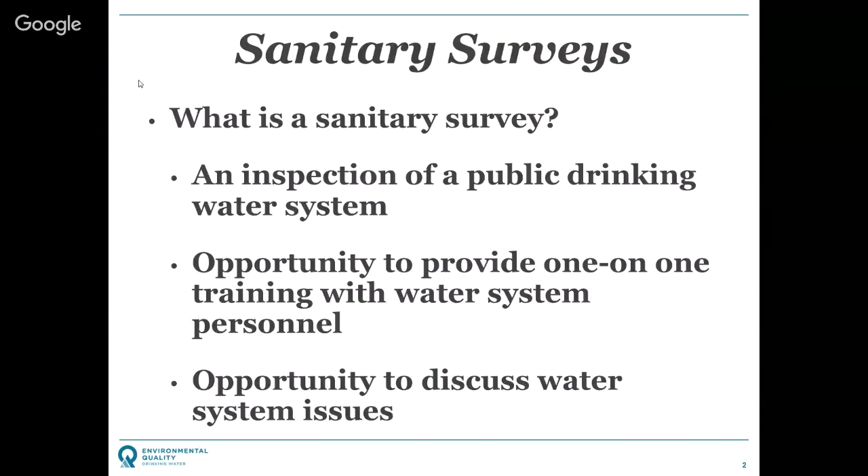Why are sanitary surveys conducted or important? Well, first of all, it's one of the cornerstones that protects public health. We need to make sure that there's no avenues for contamination to enter the water system, so we're going to look at all the kind of wear items of your water system. You can kind of look at it like a vehicle inspection. That's really what we're doing for your water system.

We're not going to be looking at the design components per se that are in concrete and hard to change. You've gone through plan review for that. Hopefully, if it doesn't meet current standards, you got an exception, or it met standards when it was built. But we'll look at those wear items and make sure that, again, there's no avenues for contamination that have appeared since that facility was built.

It is an EPA requirement that we have a sanitary survey program and that systems are surveyed on a certain frequency. As part of the rule requirements, we're audited on that by EPA, so it is an EPA requirement. And then again, we're going to determine compliance with rules and construction standards. So it's not just the construction standards, which is the physical inspection of the facilities, but also looking at some of your records and some of your management programs as well.

How often do we do those? Again, it's an EPA requirement. We're looking at systems every 3 years. This has varied across time. Back when I first started, it was different for non-community water systems versus community water systems, but we've standardized on every 3 years, I don't know, probably since about 1995. So you can plan on that.

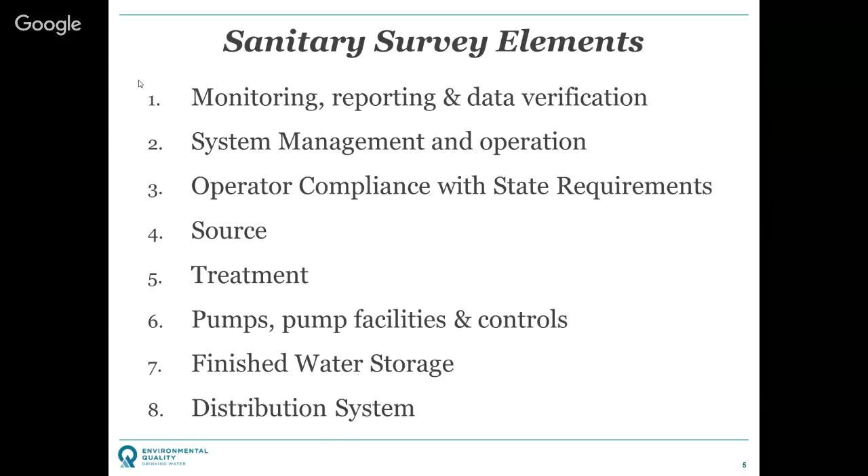One of the things when we find deficiencies, we'll note those, and we have deficiencies that range from recommendations to minor deficiencies of things that are found and things that you should look at. The deficiency that you really need to pay most attention to, though, is what we call a significant deficiency. A significant deficiency has the potential to introduce contamination to your system and cause a problem.

One of the things when we identify these, these are at state discretion, what are identified. We were required to provide at least one in each of the 8 categories. What we have for significant deficiencies is somewhere in the neighborhood of about 75 that we identified with the groundwater rule. So deficiencies are not a new concept—we've had those really since sanitary surveys began, but the adoption of the groundwater rule in 2009, we had to then identify those significant deficiencies, the ones that put the system most at risk for contamination.

So that's a significant deficiency, and what's important about that is it can cause a federal violation and also get you points on our tracking system and prioritization system, which Colt will be looking at in August with the compliance meeting. But it also does it on EPA's score sheet too. They have a slightly different score sheet, which is the topic of a different presentation because we don't have time here.

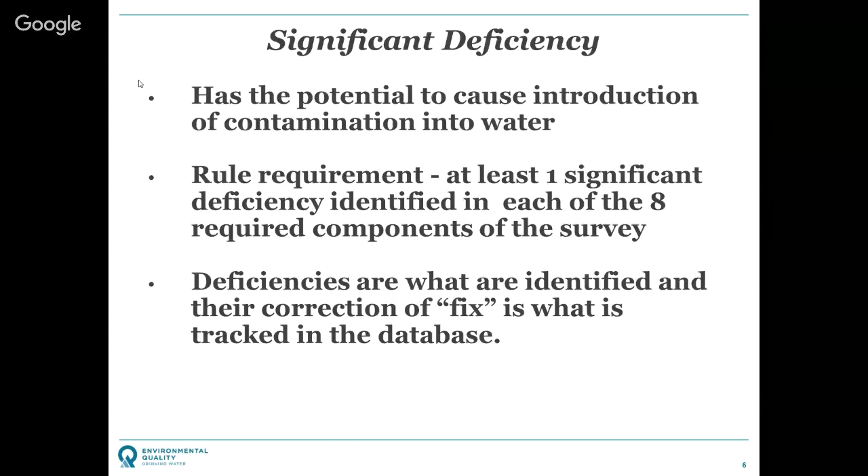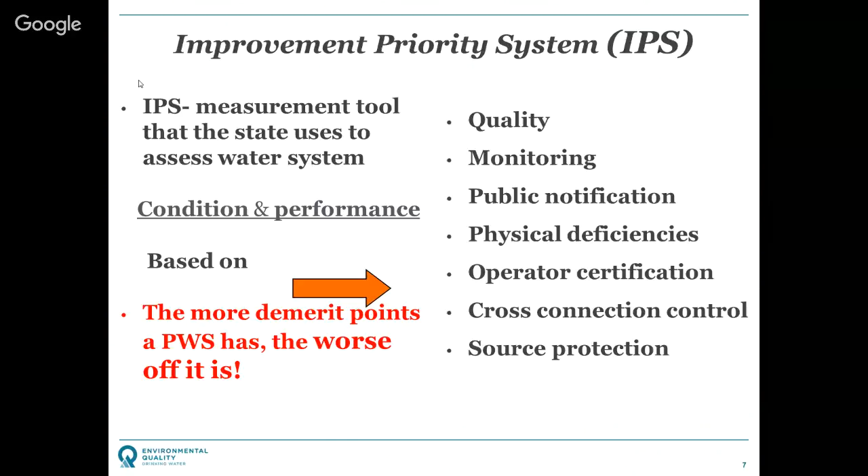We have sanitary surveys that go out and look for sanitary hazards and deficiencies. That's just one piece of keeping the water safe. We also have our engineering reviews, construction standards, plan reviews, and operating permits. But then there's also operator certification. You can have the best plan in the world, but if you don't have a competent person operating it, you're not going to get safe water. And then process controls—so it's really the gamut of things that we're requiring.

A lot of those things we'll be looking at during the administrative review of your water system. If you have a treatment process, we might ask you to pull out some of your reports. All those reports you send to us, you also have to keep a record of, or keep copies in your records for certain amounts of time, and they vary based on the type of report. So that might be something we would ask to look at during a sanitary survey, as well as some of your other administrative things and the physical facilities.

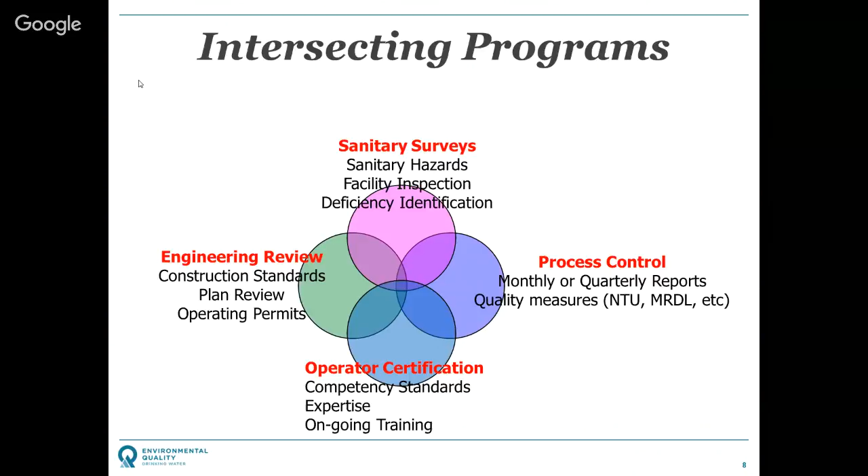So sanitary survey, that's a preface. Each system will have a unique sanitary survey because you have a unique system. We have a program that will look at the inventory of your water system and pull up a question set that matches your inventory. So if you have one well, one tank, and a distribution system, we'll pull up one set of questions for each of those.

In contrast, if you're a bigger system and you have 10 wells, we'll have 10 sets of well questions, and however many tanks you have. So it really, every survey is unique, and it's facility or component driven.

And then we'll look at the rules that apply to your water system. So depending on what type of water system you are - are you a community water system? Are you a non-transient system? Are you a transient system? We'll look at some of these other things in the depth that they need to be looked at for your type of water system.

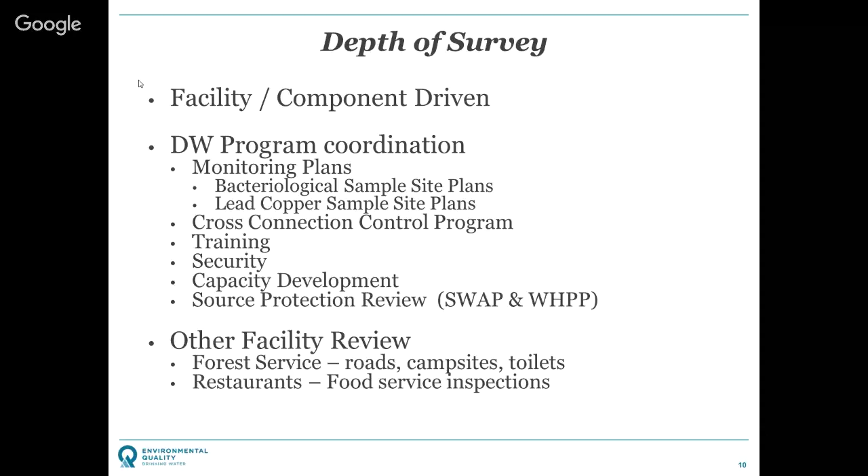And then again, for some of you, there are other people that do surveys as well. Like, for example, the Forest Service, they may have other things that they'll look at the same time as they're doing a sanitary survey for us. They may be looking at some other things. So for those of you listening that are with those other type of entities, you probably experienced that in the past.

So during the survey, hopefully a discussion is had. If there's any confusion on why we're asking a certain thing, it's why it's important. Why do we require the air vents to be downturned? Why do we require them to be screened? Why do we need an air gap here? Hopefully, if there's any confusion on that, your surveyor can dispel that. And if there continues to be confusion, please give us a call, because we want you to understand why these rules are in place.

Ongoing operator training - we have had in the past and continue to have some very experienced drinking water operators on staff, and hopefully they can relay their knowledge of operations. But we also have engineers, we have rule managers, and in that dialogue, some of that information can be transferred. And where appropriate, we really try to limit recommendations, because that's not our place - that's really kind of a consulting engineer's place. But where we can offer simple recommendations, we will try and do that.

So element number 1, this is the monitoring, reporting, and data verification. We're going to look at your system records. Usually, it just depends on your facilities, but when we look at this, we want to look at the inventory, sample history, things like that. We'll look at your population and make sure to record any changes. If you've grown number of connections, we'll look at your certified operators on staff and make sure that they meet the requirements. And we'll also look at your IPS report.

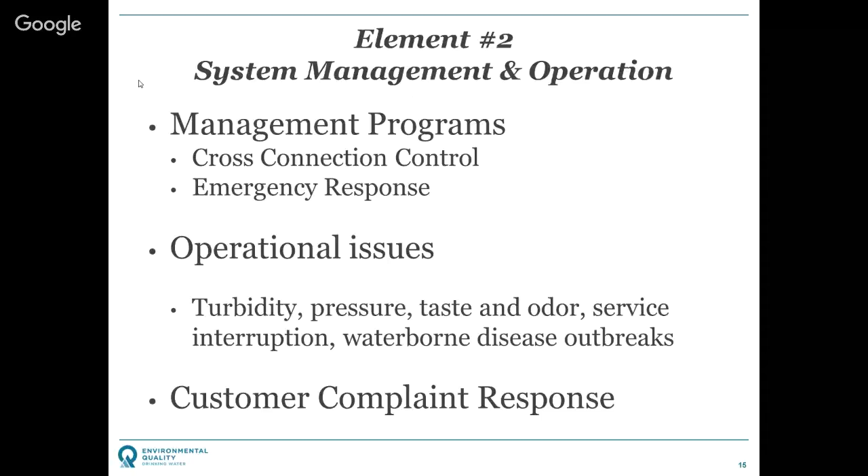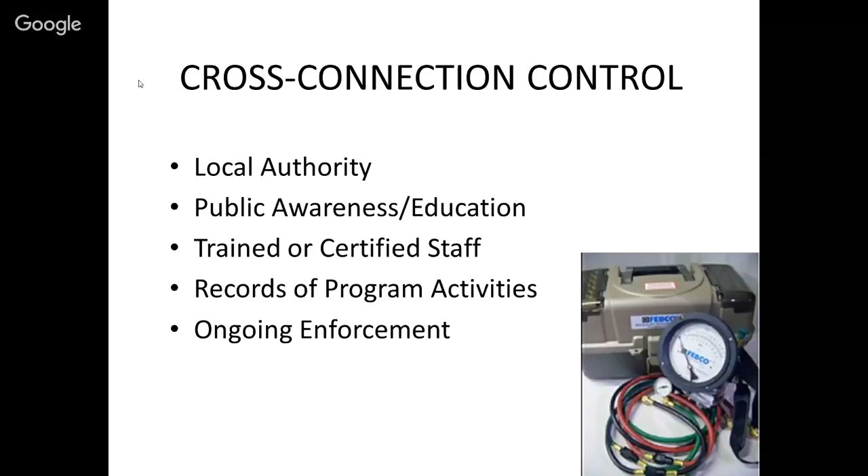Just a brief review on cross-connection control. Remember, there's 5 elements - you'll need to look at all of those. So if you're preparing for a sanitary survey, you should probably dust off your cross-connection control program and be prepared to answer questions on it.

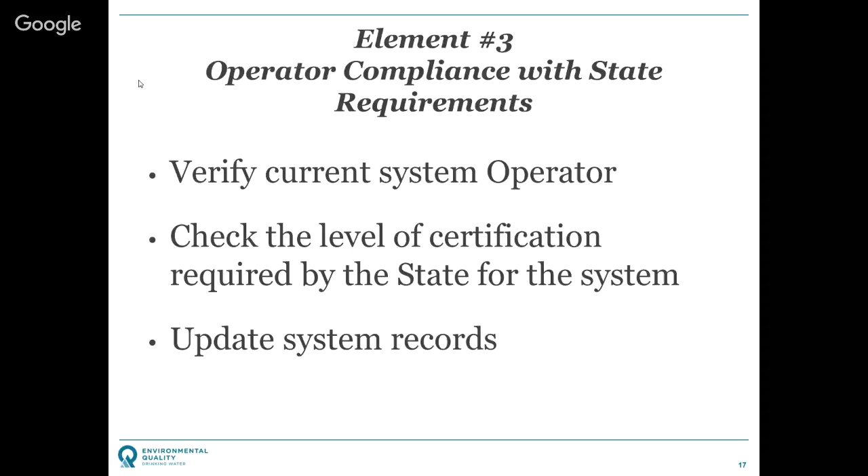Again, verify your list of operators, make sure that it's meeting the required level that we have for you, and then also have your system records handy if we want to look at any of those.

This information is pretty critical. It determines what type of water system you are. It has a huge impact on the type of monitoring schedules we assign to you and the number of samples you're required to take for various rules, from the total coliform to lead copper to disinfection byproducts, etc. So we need to really have this information correct.

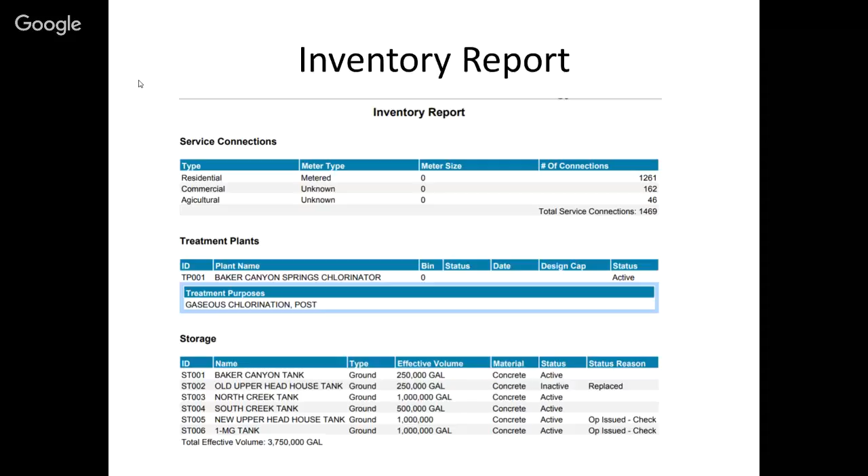The inventory, we'll go through, and there's different pieces to that. This is just the top part.

We'll review your bacteriological summary report. If you have any positive samples, we might explore with you why you think that happened. If you have more than a single occurrence in this report, we probably will explore this more, but we'll look at that and see what the situation is, again, for your specific water system.

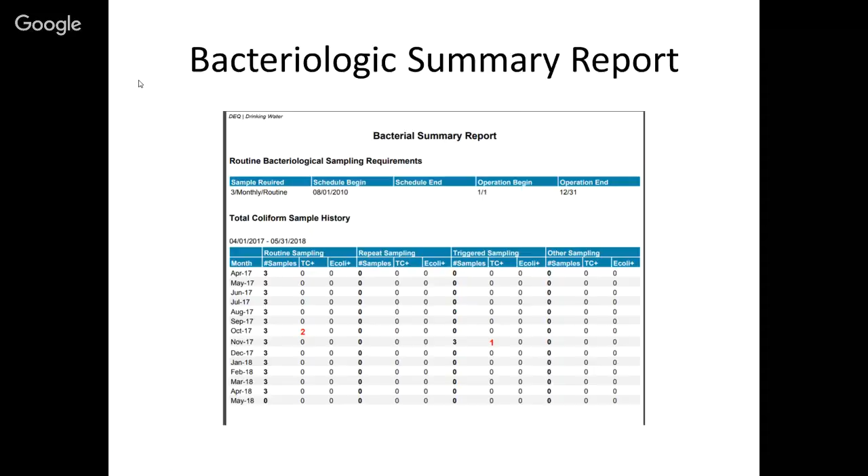So with those reports, one of the things that I learned this year was how to print these off of our website. Hopefully you all have an account and can get on our website, but how to print them so they're pretty, and all the graphics come through.

So that's my hack for today, is if you want to print these out looking nice, there you go. I know Rachel's done a webinar on this before, but here's the super secret checkbox.

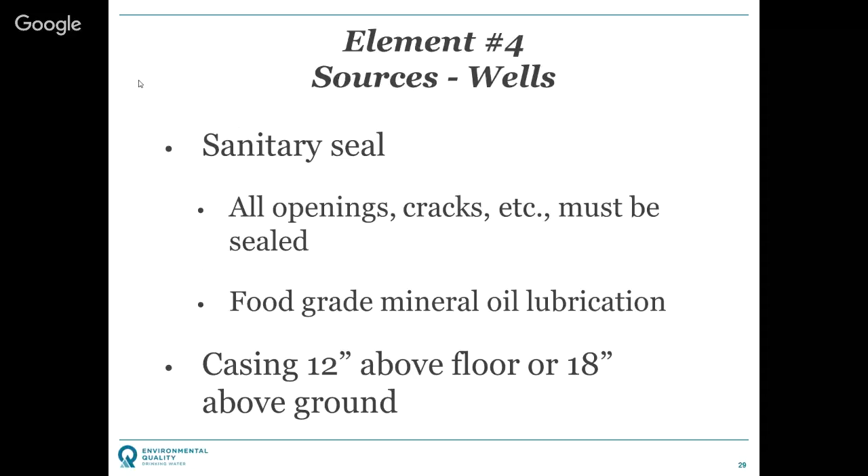So with a well, we're going to look at sanitary seals. We're going to look at the mineral oil, making sure you're using food grade mineral oil if you're using that for lubrication. We're going to look at the casing, making sure it's above the floor level the appropriate amount. We're going to look at cross connections in the well house. We're going to look at all those things to make sure that there's no avenue for contamination to enter into your well. So I'm going to fly through some of these pictures.

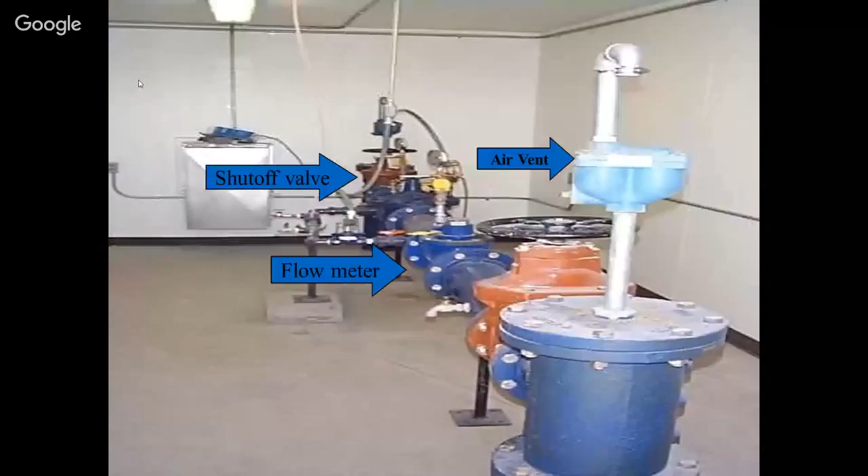Here's one that looks pretty okay with all the different elements there, with the air vent, the shutoff valve, and the flow meter that's required for a well.

We'll be looking at the screens on the vent. So not only is it that it's there, but that it has the downturn vent, and that it's screened, and that it terminates a sufficient amount of distance above any floor or containment floor drain. So if you pipe it down to the floor, it needs to terminate with a sufficient air gap above the floor. We'll be looking at those things.

This is nice and clean. We don't necessarily grade you on cleanliness, but it's certainly nicer to see it that way. We'll look at that, note any deficiencies, and note any problems there.

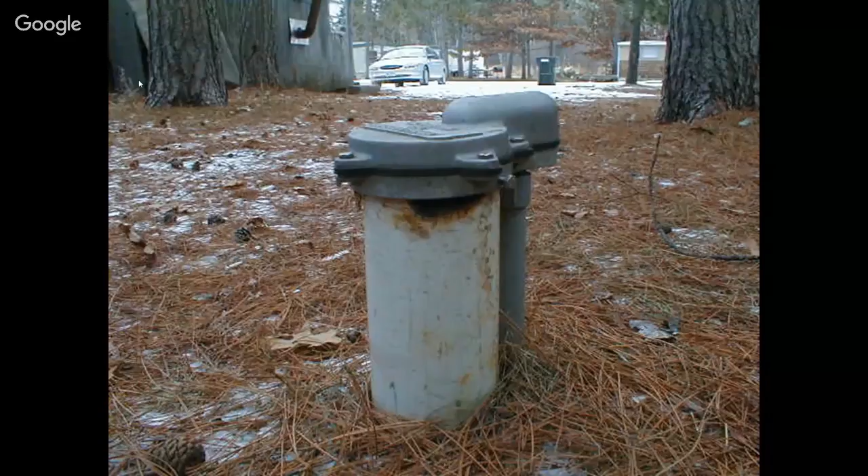Here's another one that, if you look at this particular picture, I would be concerned just looking at it, not being there in person, about that dark spot just underneath the cap. Is that just discoloration, or is it rusted, and can critters crawl in through that opening? We've had several instances over the years, probably a dozen or more, where a critter has crawled into the well, and we had one where we were taking bets on what the half-life of the lizard was for contamination. You don't want to be on the receiving side of that bet. So we want to make sure that that's intact in this case as well.

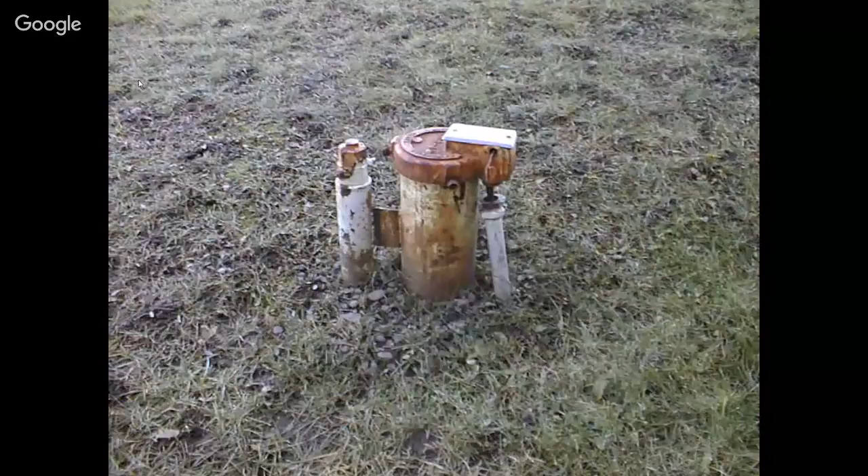Here's another one that has a couple problems. You can see where the electrical cable comes up—is that sealed? We'd look at those types of things and make sure that there's no avenue for contamination to fall into that wellhead.

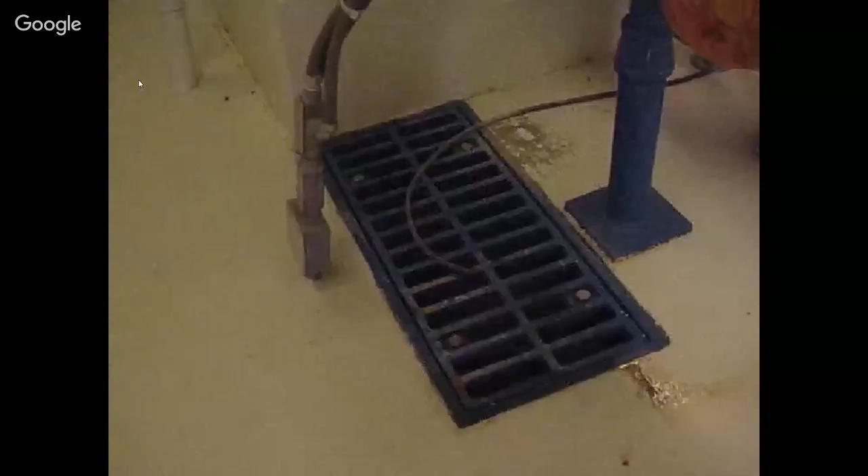This one shows a hose that probably came out of an air vac valve, and it's just laying on top of the drain. It should have something that holds it above so it doesn't fall into the drain. It has to have a sufficient air gap at the end of that hose.

For springs, some big items: if there's any ponding of water over the collection area, that's a problem. If we see the impervious liner, there needs to be soil over the spring area, which is hard to see when it's developed properly—so if we see it, that might be a problem. Or if we look in the spring box and can't see sufficient depth, that might be a red flag as well.

We're looking for deep-rooted vegetation around the spring collection box, number one. And number two, if we see roots in the collection box, that's an even worse problem. So we'll look at that deep-rooted vegetation, and then we'll look at the collection box itself—is it designed properly, does it have all the right attributes to make it safe?

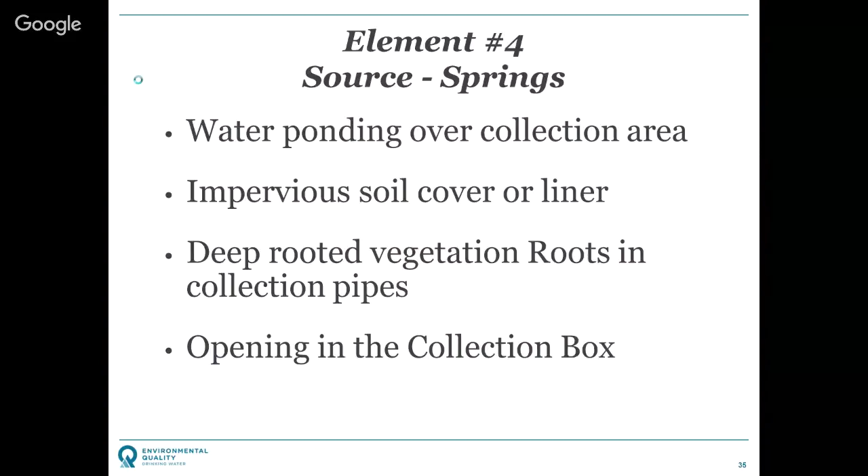This is a nice diagram that outlines a well-developed spring box. You're going to have the 4-inch rise on the access, the 2-inch lip on a shoebox-type lid, a locking device that doesn't penetrate the top of the box, the air vent properly turned down and screened with the proper size mesh screen, and an overflow that has free fall and is also screened, with a different type or size of screen. So you'll look for all of those, or their variations, in a spring development.

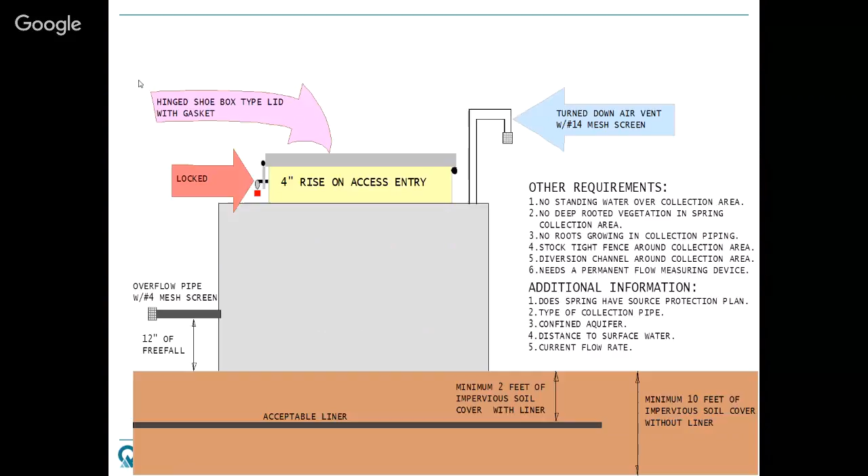Here are some problems with it, like a diversion channel. We want to make sure the water, as it flows across the ground, is diverted away from the collection area, because we don't want ponding of water on top. If we see at the edge, like in the picture on the bottom left, some liner material exposed, that's not a good thing. And if we see any standing water, that's not going to be a good thing either.

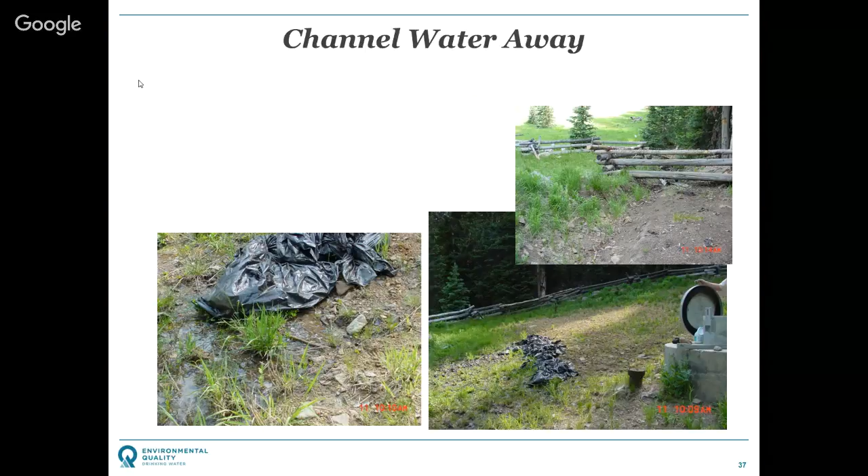On the other hand, you can look at the gasket—there is a gasket, hopefully it seals tight, and it looks like they have a pretty decent shoebox lid there. So we'll be looking at all those things.

We look at the deep-rooted vegetation. The one on the left is pretty good—there's no vegetation there. That might cause other problems we're finding, especially after some fires and flooding; we want at least some grasses there, not deep-rooted vegetation, but some vegetation. On the right, you'll see the deep-rooted vegetation that probably needs to be removed.

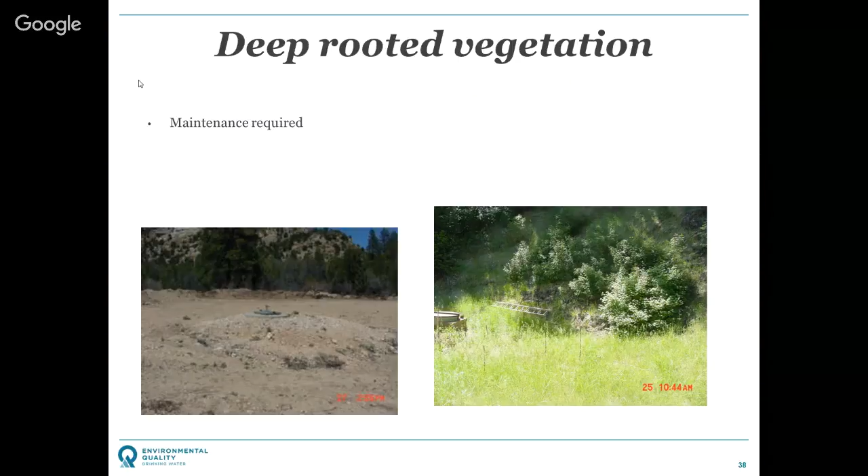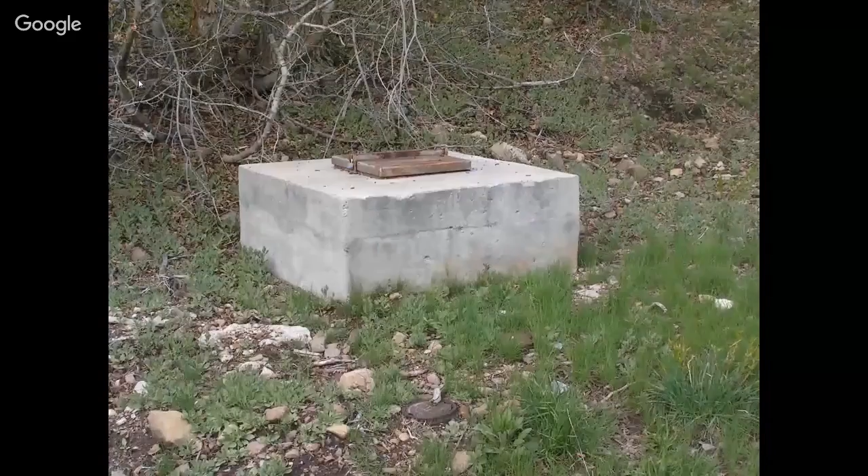The condition of the box itself is a concern. You can have all the proper rises and proper distances, but if the concrete is not intact, that's an opening into the spring box that can cause problems. This one looks pretty good from this viewpoint - you'd want to look at it from all viewpoints to see that it's up to snuff.

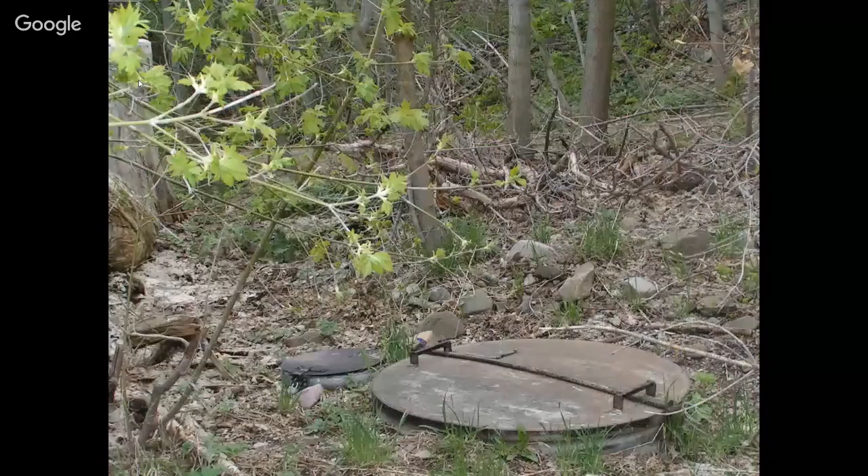This one, on the other hand, is a little too low. A flash flood would not withstand that very well.

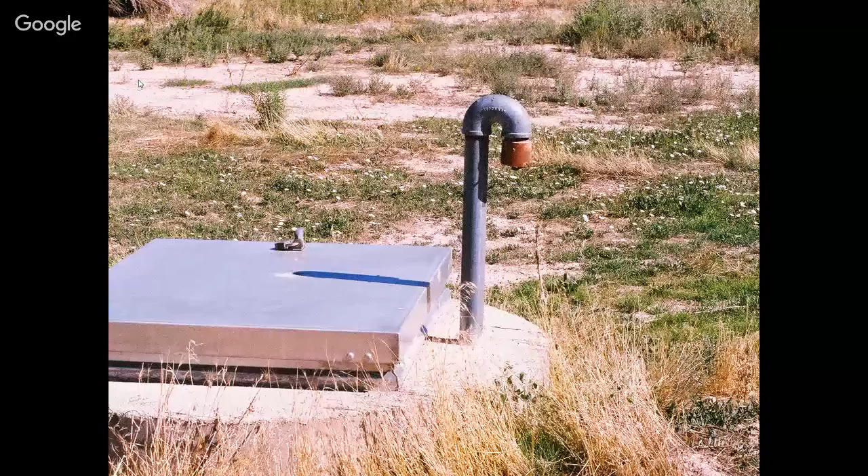And then we have this one, which looks pretty good, but if you look at the hatch, the box cover itself, this is a hatch we don't particularly like because the handle's on top, and if it gets rusted off, you have openings right into the spring box itself. So we don't particularly like those, but if you have that, make sure you maintain that handle and make sure the rivets that go through the top of the box are not rusted out, and have a sealant there if necessary.

The other thing with this particular one is the vent itself looks great from this picture, but if you look closer - bend over and look at the bottom - it has a big opening in the vent line for the screen, so you'd want to pay attention to that. Your surveyor should be doing that. They shouldn't just be standing in one position asking you questions - they should actually be looking around and observing the facility.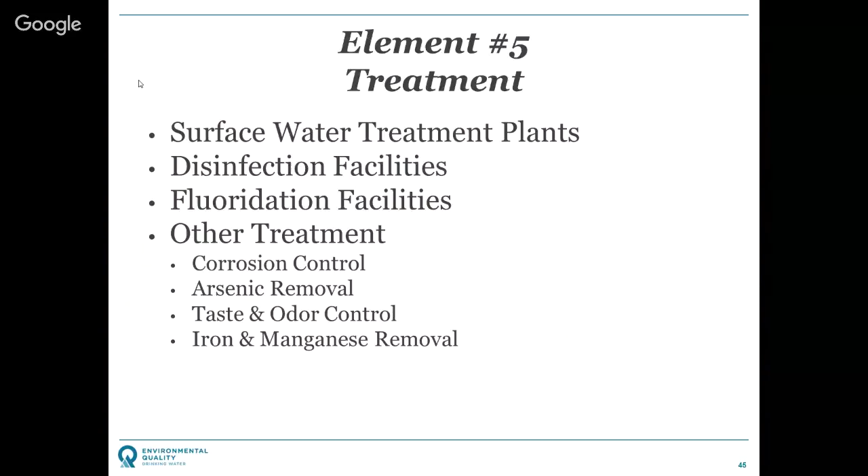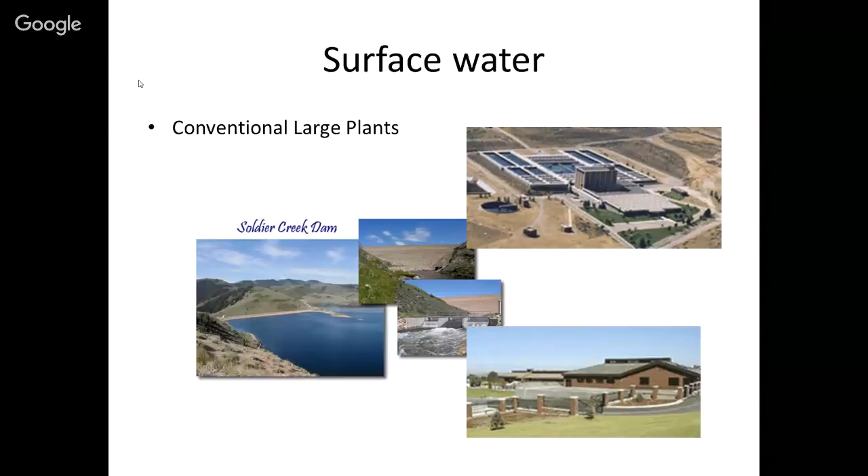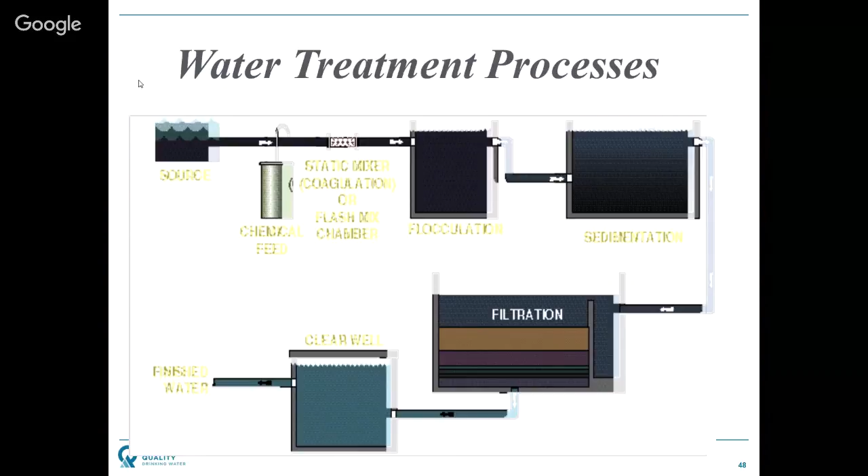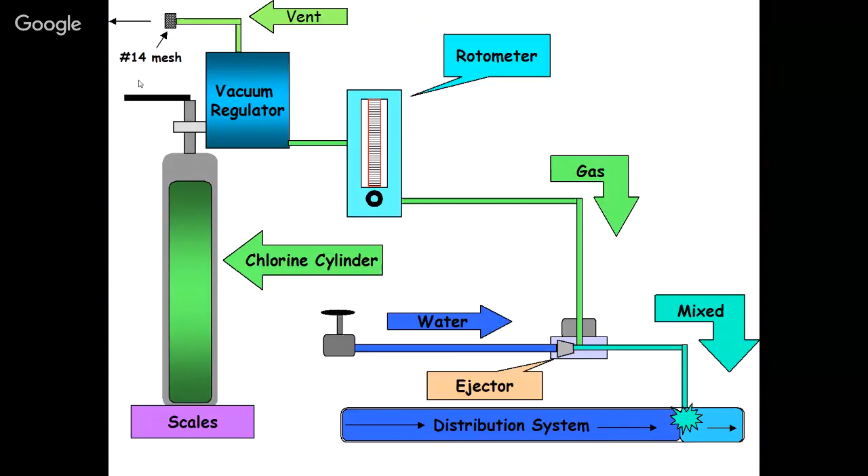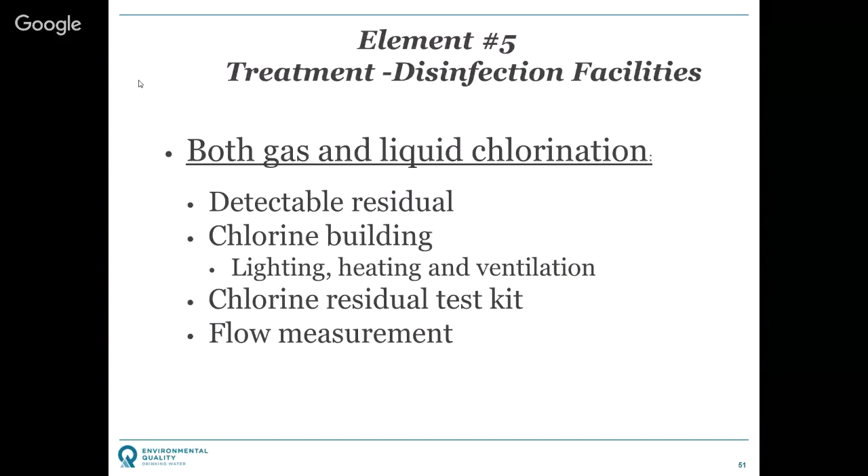If you move on to disinfection facilities, by far the most common disinfectant we have in the state is chlorine. So we would be looking at the various forms of chlorine treatment, from gas to hypochlorite, and looking at those treatment facilities and making sure they meet standards, are operational, and safe.

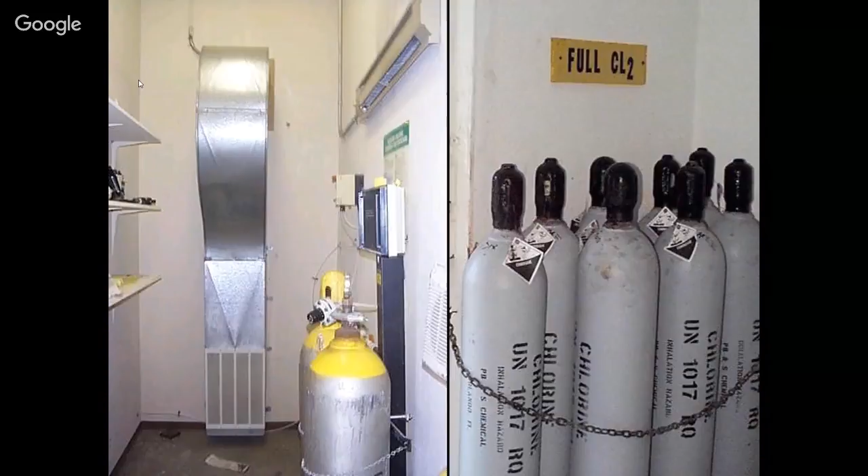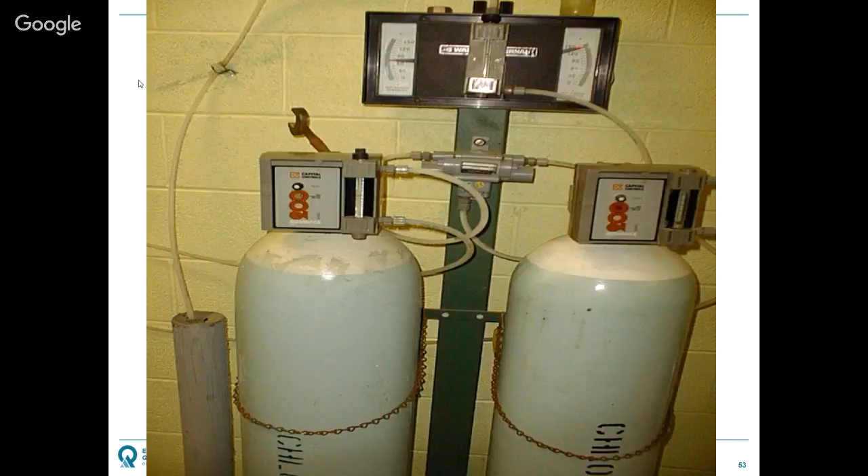So we'd be looking at how you store your facility, your cylinders if it's gas - the full ones versus the empty ones. We'd be looking at the measuring devices, whether it's a scale or a volume for the liquid. We would be making sure the tubing is vented properly and screened properly, and that the gauges where you inject it are there and operational. So the things that make the treatment operational - we're going to look at safety factors to some degree, and your records again. So treatment facilities, pump stations.

These are facilities that we didn't have in our records until 2006. But if you have them, we're going to be looking at them again from that functional standpoint.

Some of the requirements are interesting here. Redundancy is required if you have a pump station that is required to provide the pressure we require. If the pump station is not required for that, then redundancy is optional. So some of these issues depend on exactly your situation with your water system.

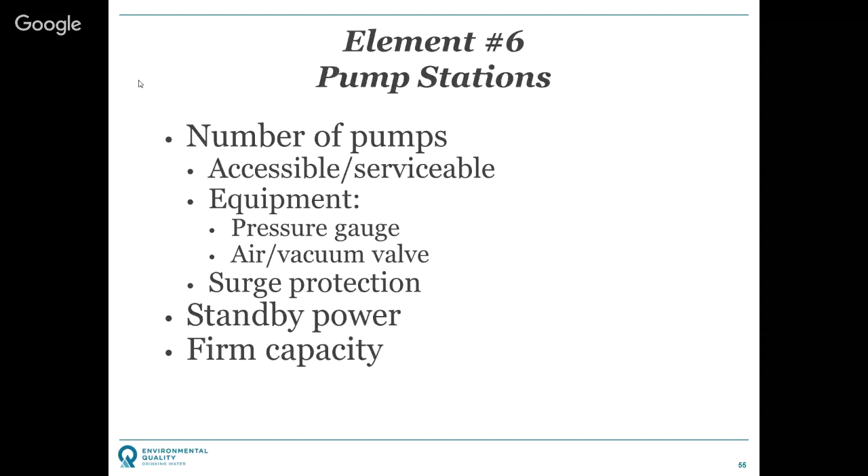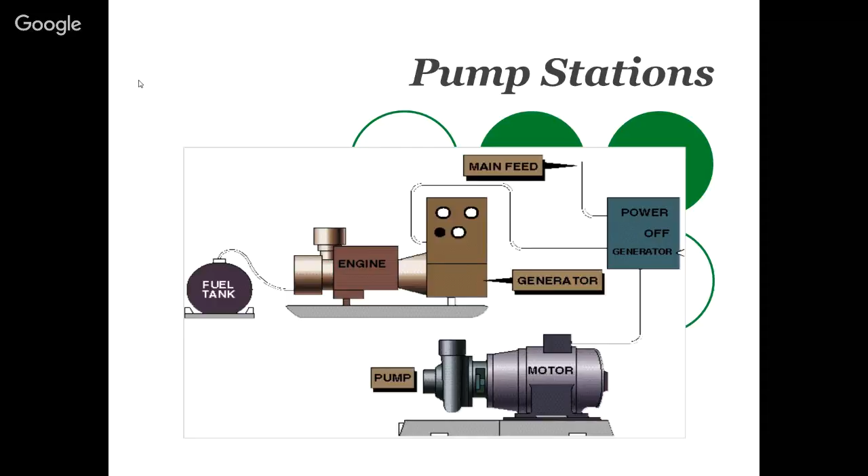Finished water storage tanks are probably the single facility that has the most deficiencies found on them. I don't know if that's just because they're above ground, easier to see the deficiencies, or because they have a lot of wear items that probably fail over time, so that might be another factor.

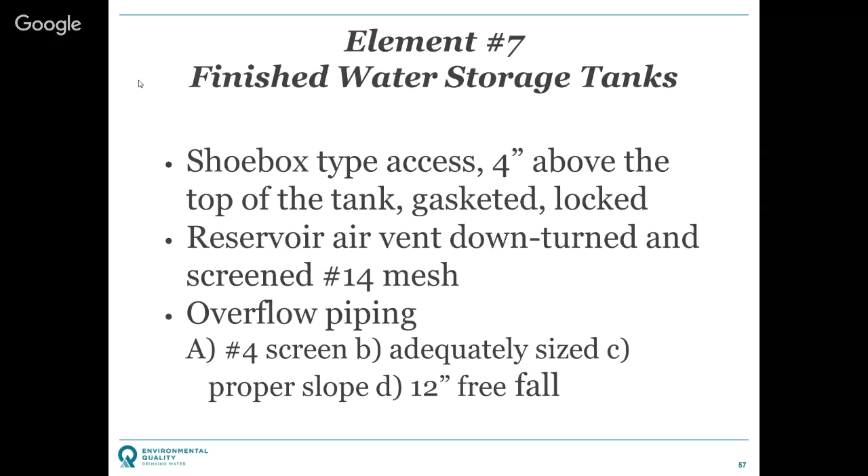We want to make sure they have the shoebox type access, that they're vented properly, that the overflow piping is properly screened, sized and sloped. With your storage tanks, we want to look at the drainage of water away from the tank so the foundation isn't compromised. We'll look to make sure you have a watertight roof.

Contrary to Seattle and New York City, we do require our finished water reservoirs to be covered, which I think is a good thing. We'll look and make sure they slope to drain, that you don't have puddles on the roof causing problems, and check the drain lines, overflow pipes, and access hatches.

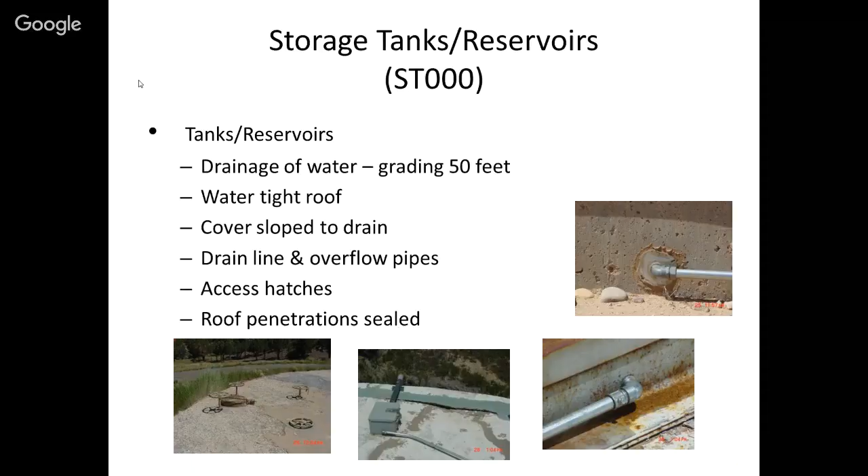This is just a variety of pictures showing different penetrations for various SCADA systems, etc., making sure they get sealed properly so no contamination can enter. We're going to look at the hatches and make sure they're raised appropriately.

For some tanks we'll look at the interior. If a surveyor doesn't look inside your tank, they're not doing a complete job—they should be looking inside every tank. You should be prepared for that with the proper keys. We'll be looking for any leakage or any damage.

Small things in concrete tanks become big things, and we've tiered our deficiencies to reflect that. If it's minor damage versus major damage versus a big hole in the top of the tank, our response would be appropriate to the risk of each of those.

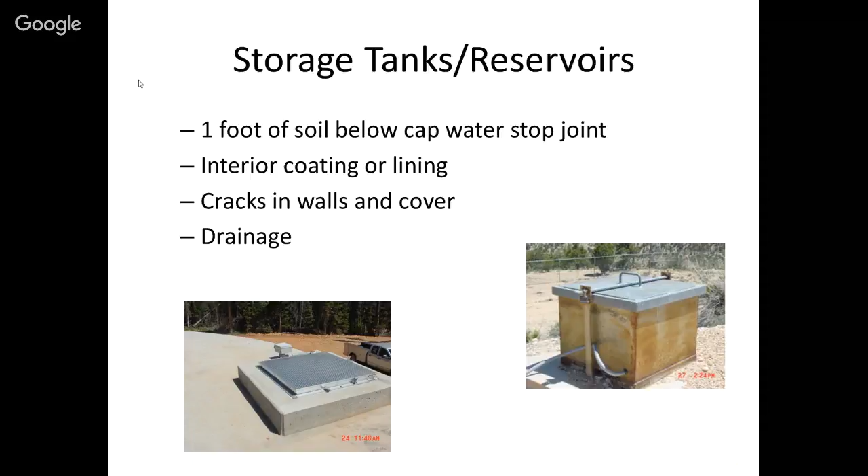Here's some examples of some pretty good tanks that you can see. Again, nice access—you can see the vent that's a candy cane. Can't see the screen, but you can get up there and look for it and see that it's appropriate.

We have tanks that are concrete, and we have tanks that are metal. One of the things we don't typically have in Utah is elevated tanks—we only have a handful of those compared to the storage tanks that are on the ground or buried.

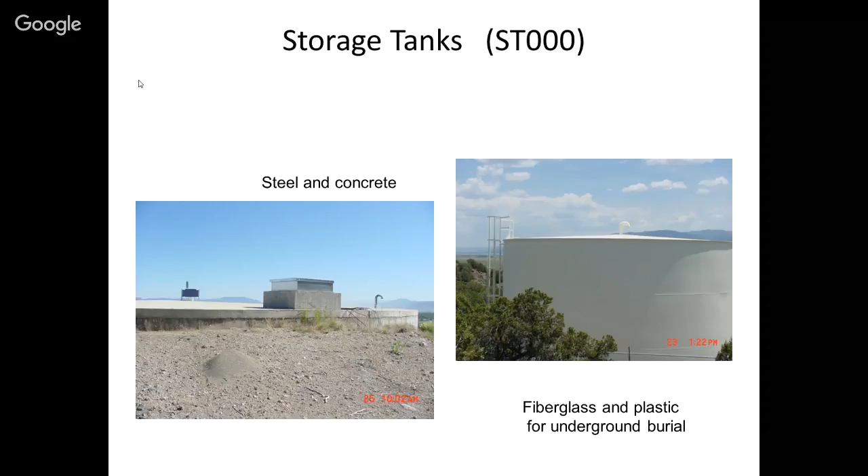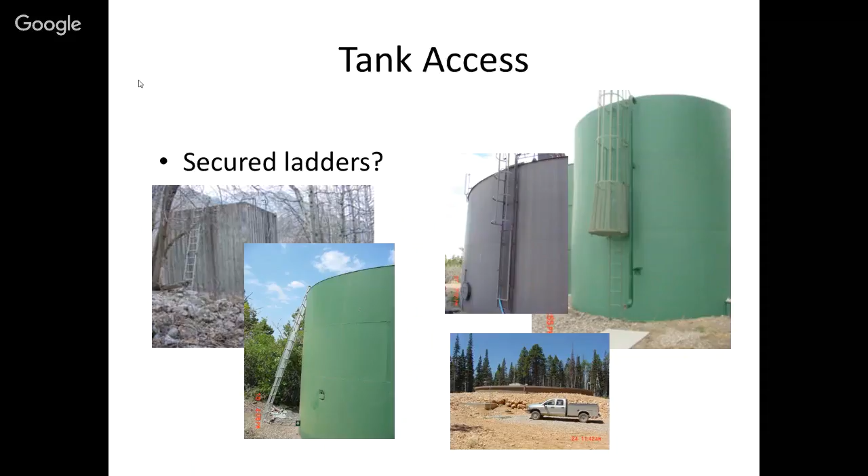We'll look at some safety features. We're not OSHA, but we do have requirements for the access, so we'll look at those, and if you don't have them you might get a deficiency. Here are some examples of good safety cages—the ladders are not the best way, but we'll just be looking for access there.

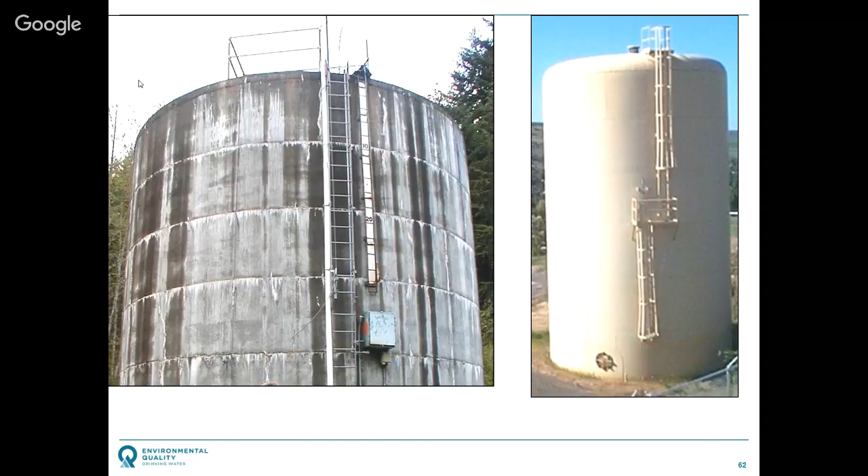Here's some with nice access ladders and railing at the top—those are all nice things. Again, OSHA rules aren't our rules, but they still apply to you and your water system. If you don't have good access and safety equipment, it's more a problem with OSHA than with us, but we'll look at it in a brief manner.

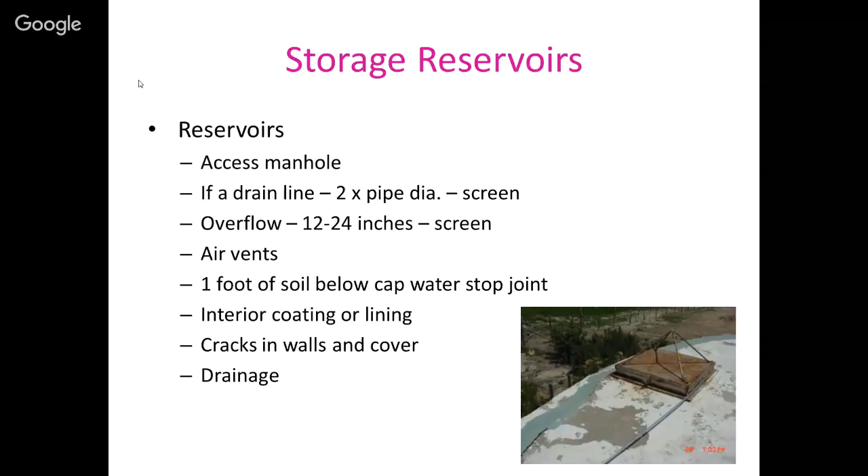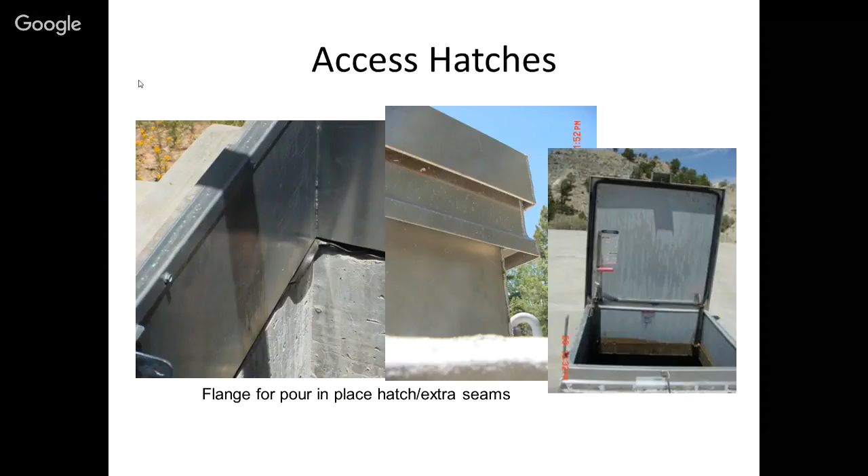The construction is meant to be sealed in concrete. In this installation, it's not, so it might have access underneath—we have to evaluate that. Here's some that have the shoebox, but what you don't have is sufficient rise above the tank surface to meet our standards, so those could be a problem.

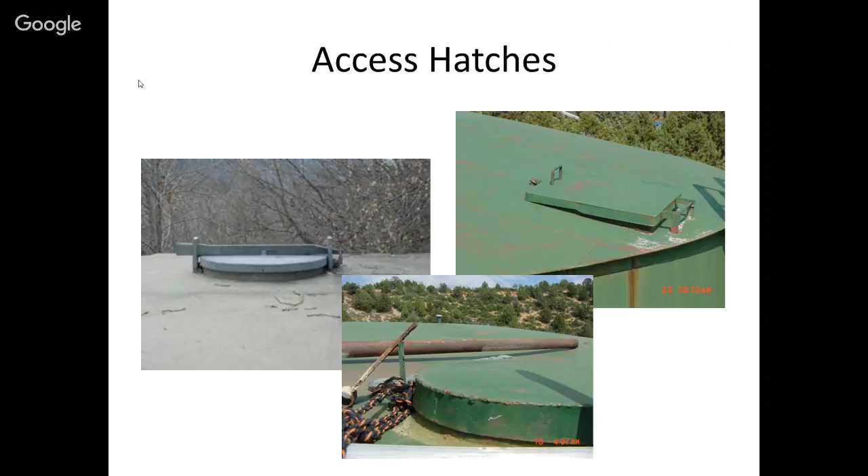Here's one that looks pretty good—it's buried, it's locked, and it's got the sufficient rise above.

Anyway, this one looks pretty good. Here's some accesses that don't look so good.

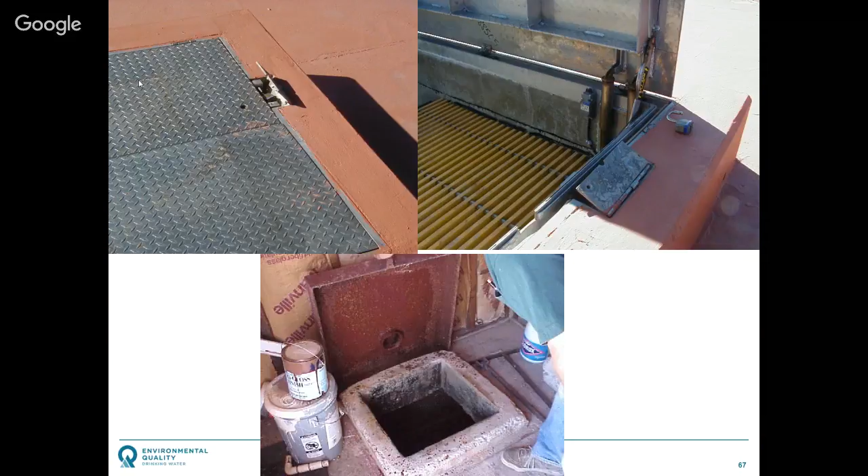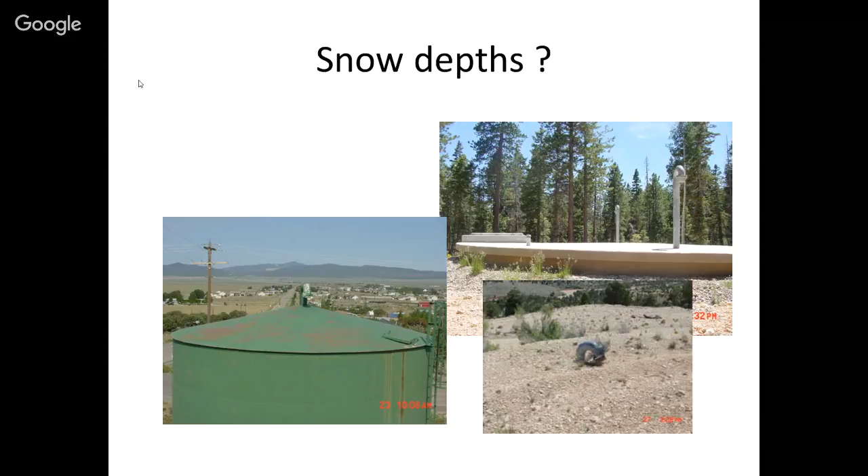If you have high snow depths, in a high snow area, we require you to raise up those vents higher so that you can be above the typical snow level. If that happens, we'll look for that.

We're looking at an air gap, a 12-inch air gap on your drain lines, and making sure the screens for the overflow are number 4 mesh screen. We'll make sure those are there.

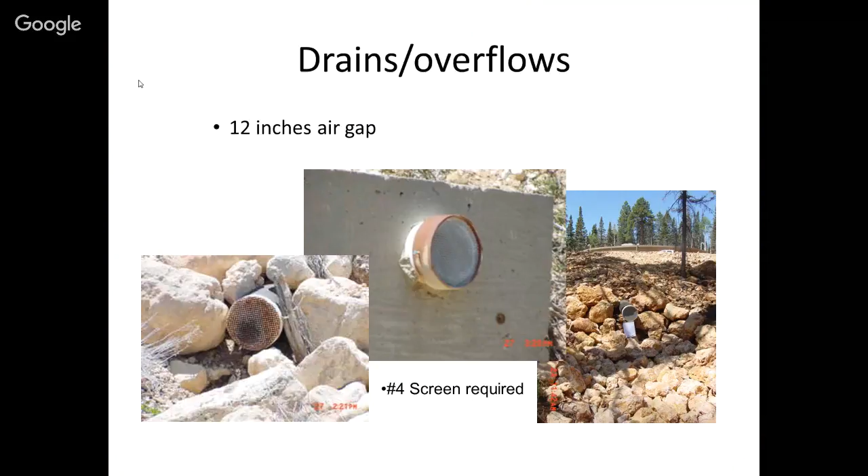And again, the vents, we'll be looking at those to make sure they're downturned so wind-blown contamination can't enter the system, and that they're screened with number 14 mesh screen. If they're 6 inches or bigger, I believe, one of our engineers can correct me, they need a support screen. But if they're smaller, they just need the number 14 mesh screen. We also want to make sure they're sufficiently above the height of the roof of the tank so they have free flow of air.

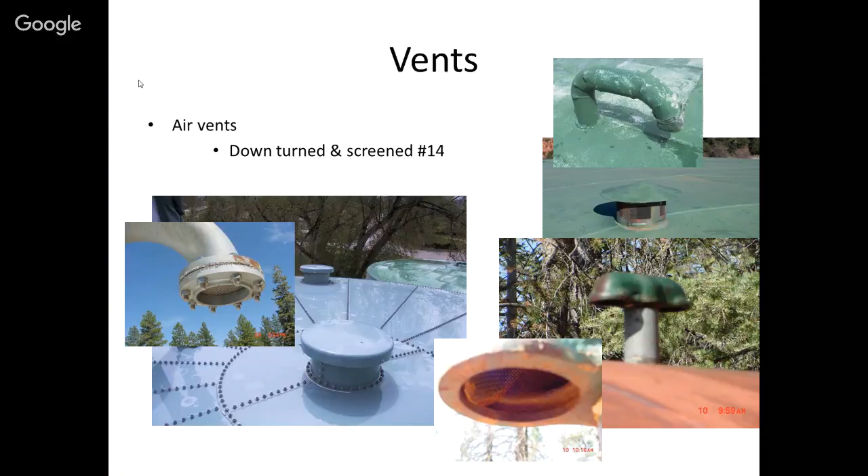One of the most recent waterborne disease outbreaks we've had in recent years is in our neighboring state of Colorado. We had one individual die, and that was from a situation like this where the tank had corroded, where the roof, the seams in the tank from concrete, corroded away, and they left an opening for rodents to enter. That was a salmonella outbreak, I believe. It was that bug that they had.

So the structural integrity of the tank is a big issue with us, and again, we'll look at that from minor to severe damage and assign the appropriate points and significance to that.

So the last element here is your distribution system. Harder to look at, obviously, because in most cases it's buried, although not all. We're looking at the system pressures, we're looking at piping materials. Again, both hard to look at.

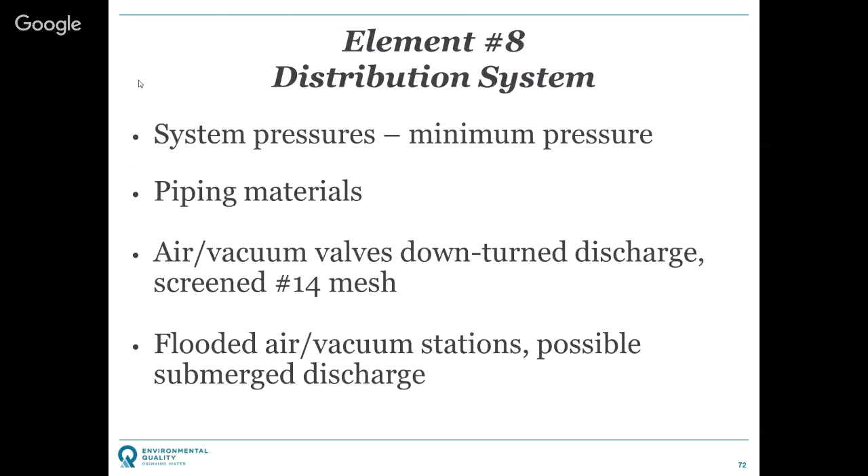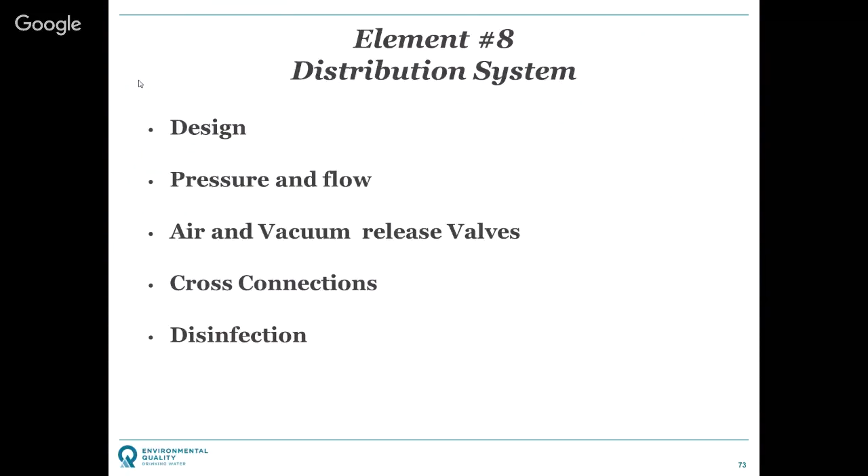We'll look at the air vac valves that you have, make sure they're downturned and screened. And then we'll look at whether those air vac valves are flooded or submerged, and ask some other questions regarding the distribution system: design, pressure and flow, air vac release valves, cross connections, disinfection.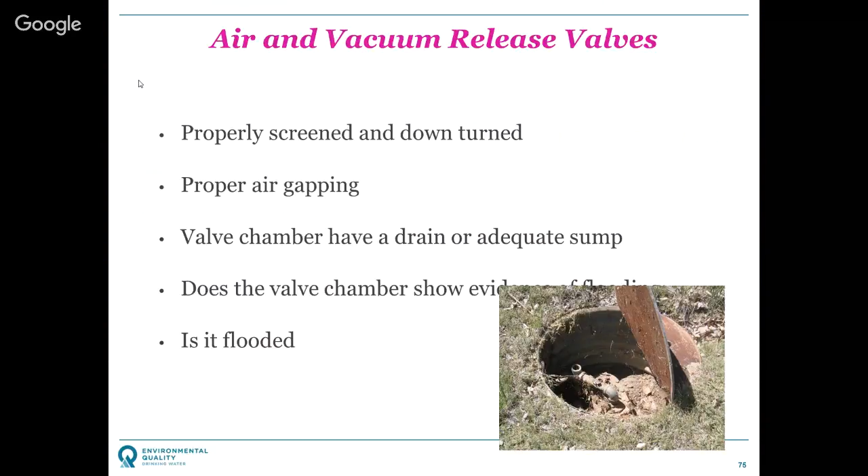Again, I had a picture, so I put it in there. Here's an air vac valve that probably would get some deficiencies. One, it's not vented above ground, above grade. I can't really see in there, but if it looked like it had been flooded recently, that would be more significant. If it was actually full of water, it would be even more. We give it even more points.

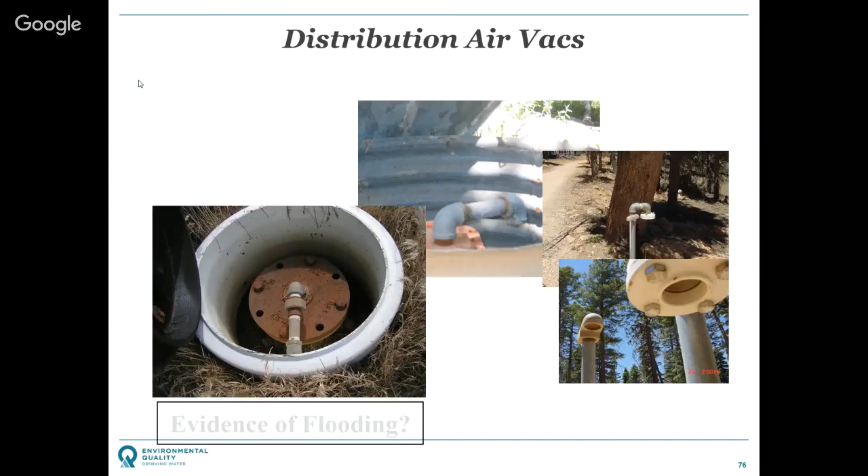So again, we'll look at the severity, and what we're looking for is that vent line comes above grade so that contamination can't get sucked back down it. That's probably one of the biggest things that we can actually see as far as design goes.

This is where our rules have changed over the years, so some of these are time related. If you now have fire hydrants on your system in any new construction, you have to have 8-inch mains providing water to that. We've modified our pressure requirements. It used to be 20 psi at all times, and now it's tiered based on the flow that you have at any given time, from fire flow to peak daily flows to just normal operating pressures.

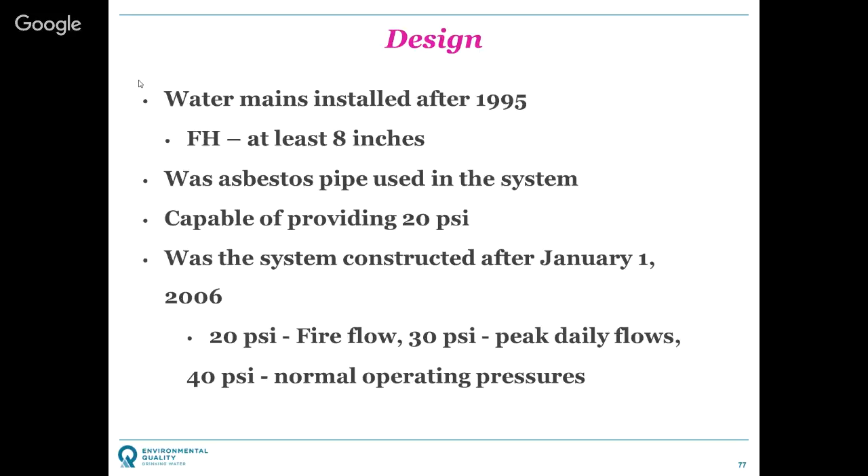Most of the pressure issues really come to us more as a customer complaint that we would follow up with you, rather than a question-answer during a survey. But that's where we're at with the distribution system issues there.

And then the last one we'll look at, and it's really interspersed with all of the facilities, is water system security, especially since 9/11.

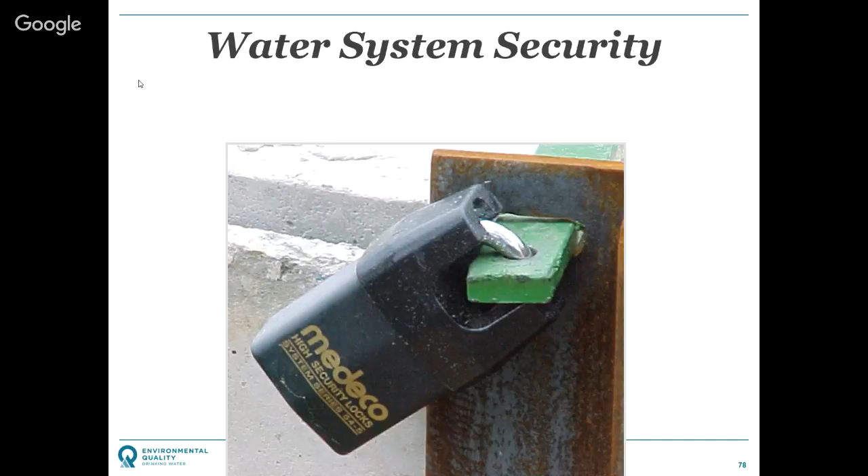This has really jumped to an important issue, and we think it's important that your facilities have some security on them - they're locked, fenced, or whatever is appropriate. We'll give you points if your facilities are vulnerable.

So in summary, if we go out and look at your water system, what are we likely to find? I'll show you some statistics used for a project about 10 years ago, but I'd bet they hold true today - the top 25 deficiencies in order of most frequent. We have lots of violations or deficiencies for cross-connection control programs.

All 5 elements are represented in the top 25. But beyond the cross-connection control program, you'll find things at the source, like no flow measuring device on springs - that's pretty common. If you didn't have a sample tap on your wellhead, that's another common one.

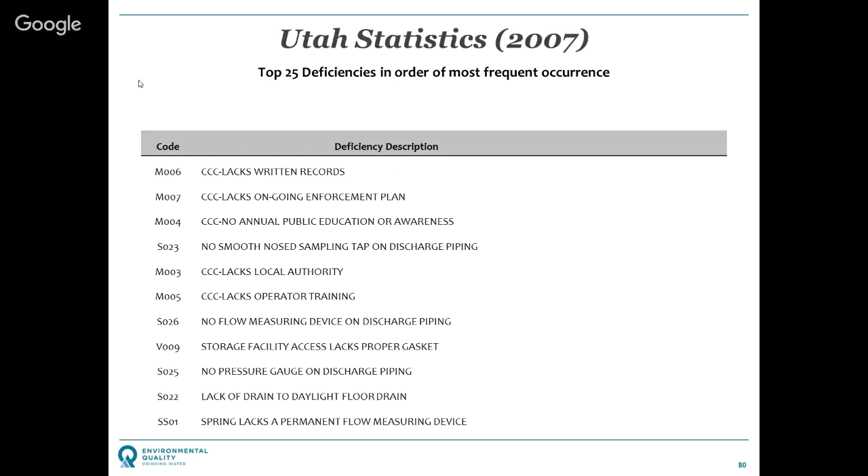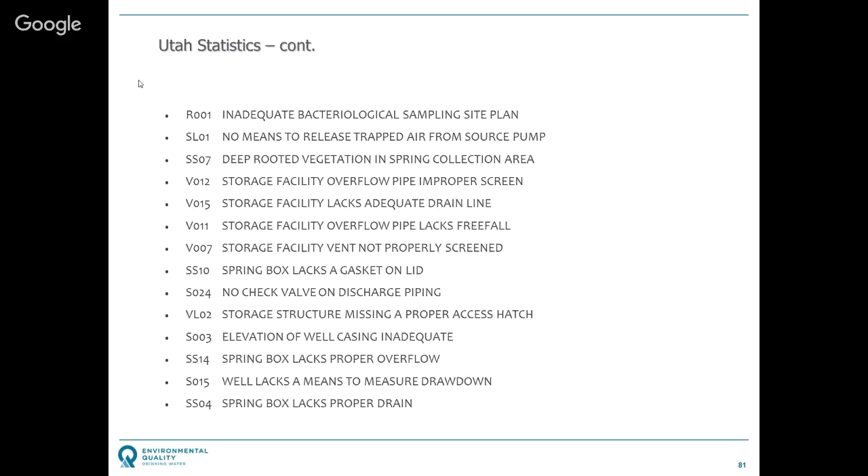And then we start to go into some tank violations. The one that really kills me, if you look through the list, is the inadequate bacteriological sample site plan. That one we can probably take off the list - the original requirement dates back to 1991, so even in 2007 it was ridiculous that this was still on the list. But now, after the RTCR, if you still don't have one, shame on you. I hope that one is no longer in the top 25. But we have a lot with tanks.

In fact, this list was for an EPA project, and if we looked at the deficiencies, 21% of them were based on your tank facility. So if I were to look in my crystal ball and predict what we may find wrong with your system during a sanitary survey, I'd say you may not have a complete cross-connection control program, and I bet there's a problem with your tank - the statistics support that. I'm not going out on too big a limb telling you this is what we'll find.

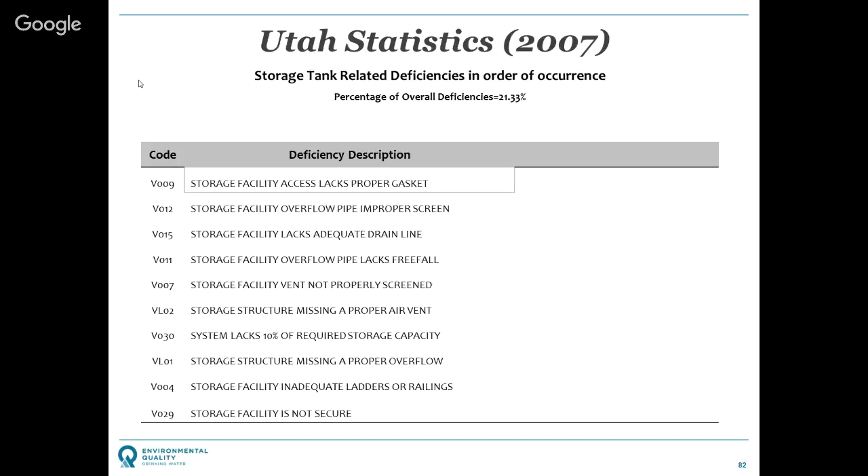With that, we have some senior or experienced operators on our staff, and they're not going to be happy with me, but here's their contact information. They also do our technical assistance. A major portion of that is Pete Kears and Ryan Deering - their contact information is here at the division.

If you're looking for templates and rules, you can go to our website. For best practices, you can go to AWWA and Rural Water. On our website, drinkingwater.utah.gov, if you click on our contacts, it'll take you to a staff page with contact information based on people's skill set. We welcome you to call any of those staff people - we're happy to help you out.

So with that, Colt, do we have any questions? I don't think so.

So we were clear as mud. Is that the takeaway? If no one's asking questions, that, or we did schedule this one after lunch - so in other words, it was clear as mud, or everyone is asleep. Everyone is asleep. Well, thank you, everyone. Again, give us a call if you have questions, we're happy to help you out.

And if you want us to send you a copy of the questions we'll be asking during the survey, just give us a call - we can certainly email those out. Maybe we'll just get them put up on the website, but they're not there just yet. All right, thank you, Patty.